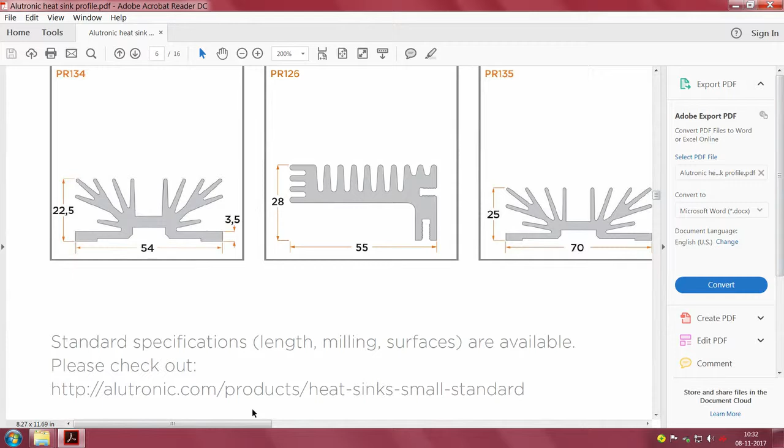Now, not every time do they start with absolutely new fin designs and so on, because these have been routinely used for such a long time. Now, if you have a look at a typical heat sink from the manufacturer, you will notice here that several of these profiles have already been in use for quite some time.

You have seen this here. So, you have something which is typically around 100 mm wide. So, this is the 100 mm wide heat sink, and then there is a 4.5 mm base for this aluminum. Now, I will try to move it here. Now, have a look at this heat sink which is about 111.5 mm wide, there is a 10 mm base.

Now, if you see the sample which I have here, sir, show them the sample. That heat sink probably belongs to one of these things here. Can you see this big monster here, and in fact at the base it is a little bigger, it is 18 mm thick. So, I will just take these things off. See that, and this is not a manufacturing defect, it is just that the extrusion has come like this, and maybe during our handling it has bent.

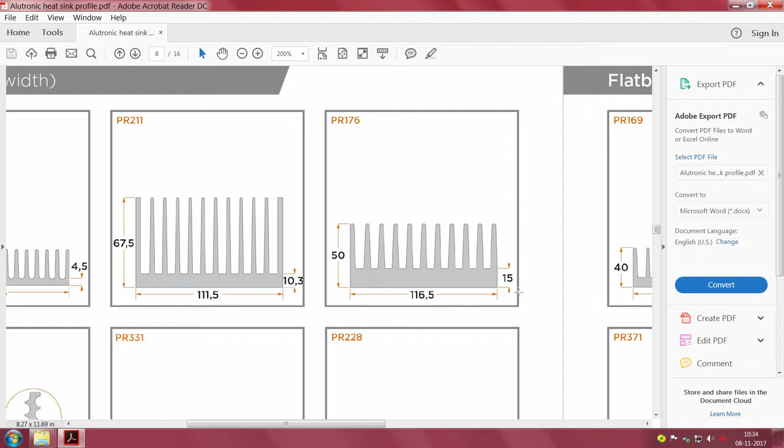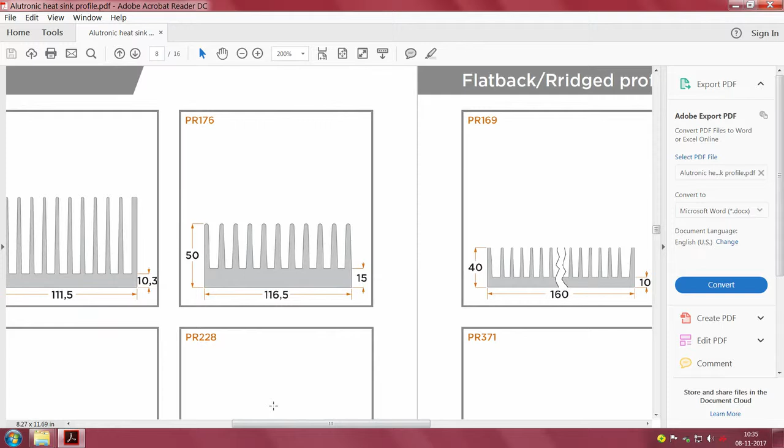Now, coming back to our sample here, such standard or generally replaceable heat sinks are available like this. Why people use one of these profiles is that something nearby will already be available. If you are designing for something, we know very well somebody else probably has the same type of requirements, and somebody in the world has made something a little closer to that. The advantage of using this is they are not very expensive, and once you buy a profile like this and keep it, you will be able to use it without any issue at all.

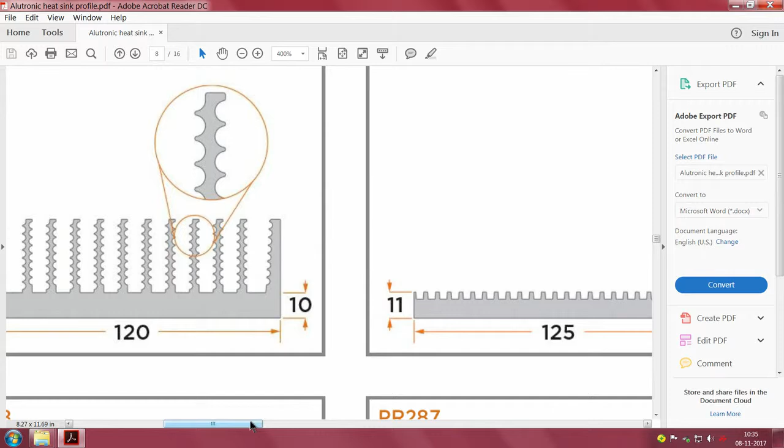So, I will just try to go down, and you see here one more important thing: if you are to make your own, we may not be able to achieve this detail which they have given here. You see the detail there at the left, some attempt has been made to increase the surface area by providing additional ridges. Now, the next question you may ask is, sir, does it really help? That is for you to make a model and then compare what they have with what you have, and there is no IP involved in checking these proportions and adopting something similar.

Now, if you again look back at this small thing here, can you see here? These ridges are a little offset. Is it good or bad? It is for you to decide. From my point of view, I feel they have optimized the load involved in creating the extrusion. So, if you just put a tapered extrusion and give a few cuts on this side and that side, it may or may not be useful.

But if you see this corner here, the way they have offset it, and while the detailed drawing does not clearly give you the details, probably the base is a little wider compared to the top, and we need this specific type of design because these are all extruded in long lengths. I am not very clear what the current standard is. In the shops you will get them about a meter long, but in the extrusion industry they are all made for building standards. Building code requires that you start with something typically 3 to 4 meters long. So, you have 4 meter machines and 3 meter machines.

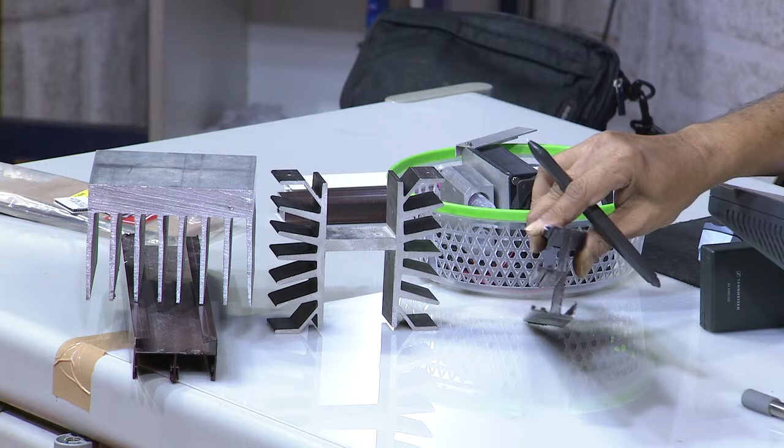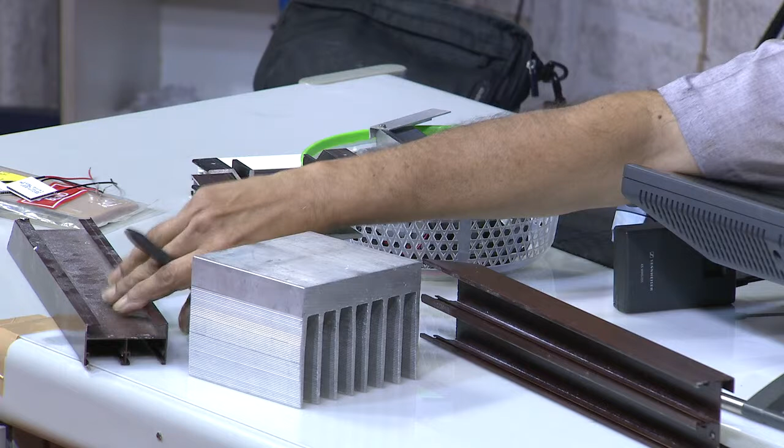Now, if you can see the samples which I have put there, these are all samples taken from the building industry. I do not know what exactly this component is. There was some construction going on, I just picked it. It probably looks like an extrusion for a window or something like that. You see the mitered or 45-degree joint there. So, two of them can be joined together and you can make something a little like this.

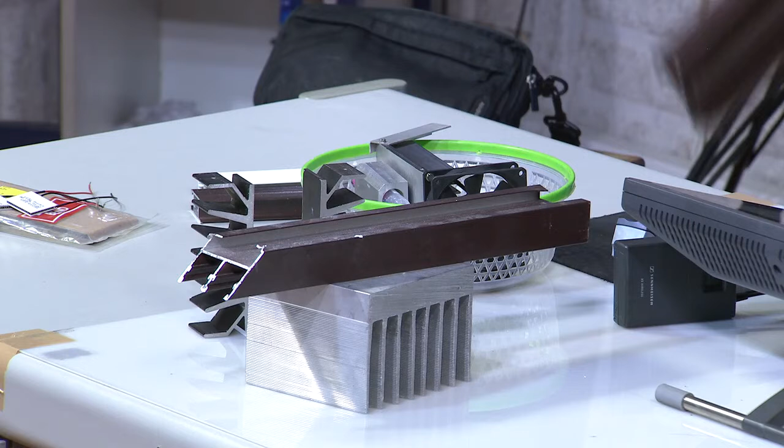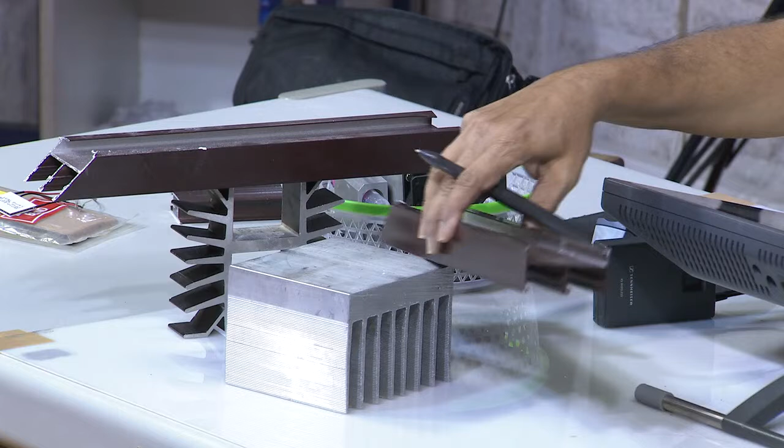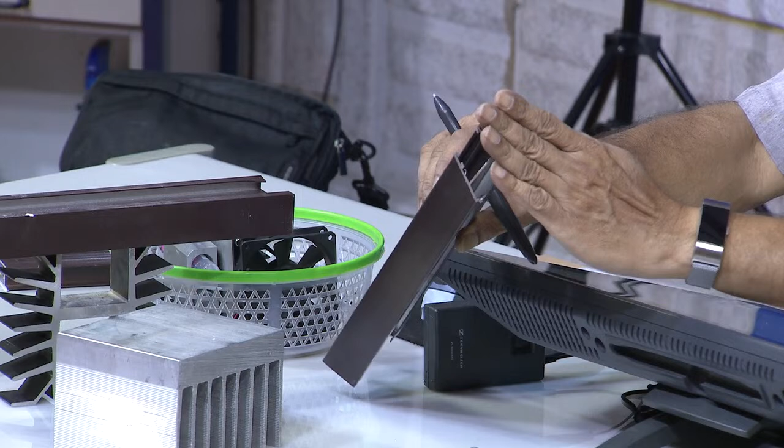Unfortunately, that element of detailing is in no way useful for us. They have made some arrangements for something to slide inside. There is some extrusion, I mean one angle, something which will go here, and they meet perfectly, and then you can assemble things. These are not useful for us in any way when we talk about our own electronic extrusion.

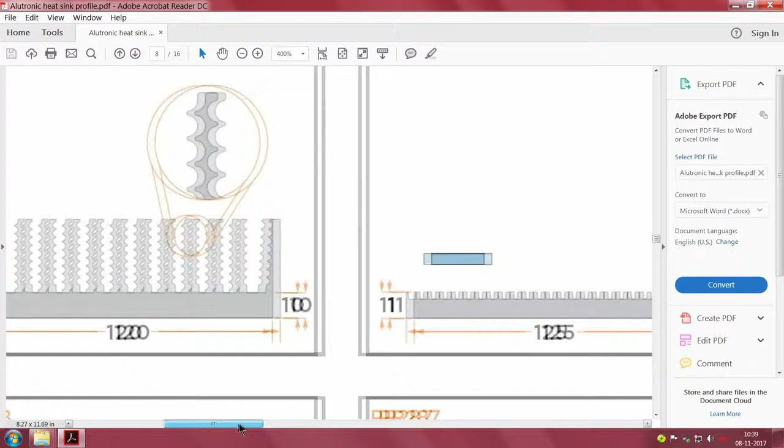So, the Alutronic extrusions you see in this catalog have been specifically developed with our concerns in mind. If you go down, you have very simple, straightforward things like this. See, this one has only a U-shaped base, so that will give a general advantage. Then ridged profiles, which I have shown you already.

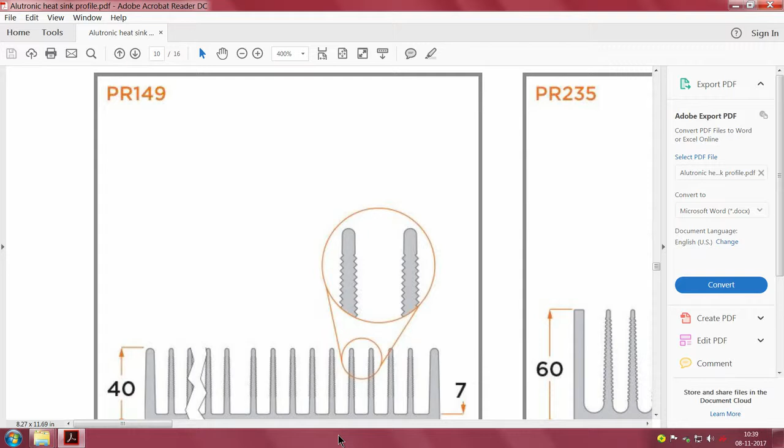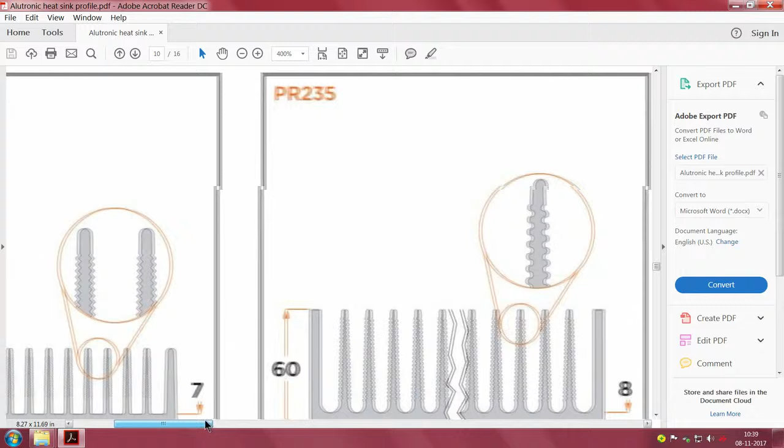You see here they are directly in opposite directions. There are these ridges here. You have noticed something which is very different. Here it is tapered. So, probably the actual electronic users like you and me have insisted that they want a heat sink that is much more effective. Now, you notice this is slightly different from what we have seen there.

That same ridging is available there, which is a radius ridge, which probably has some advantages, and to make the fin effective it is much wider at the base and much narrower at the top. Now, whether it is calculated or not depends on the manufacturer, I will call them the vendor, with the actual user, which is the designer.

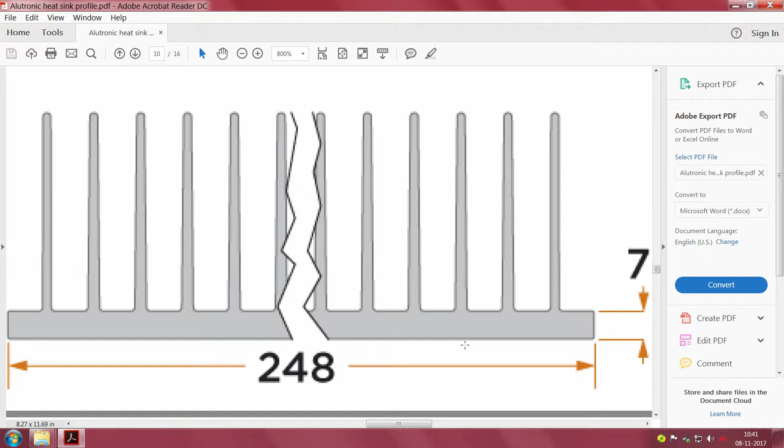I expect that since this tooling is very expensive, somebody has done the homework, and these days homework is done by carrying out a simulation, probably in a computer, and then they should physically analyze which is good for them. You understand? Some of these, if you see, are very thin, so not very effective, and that gives you a general indication that these are probably meant for simple natural convection, not for forced convection.

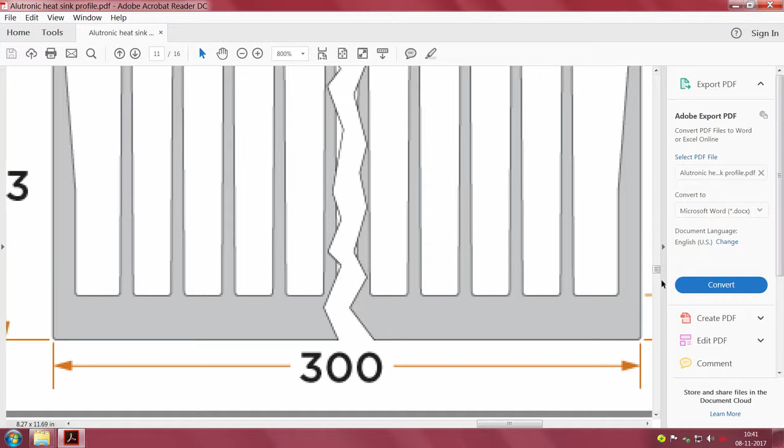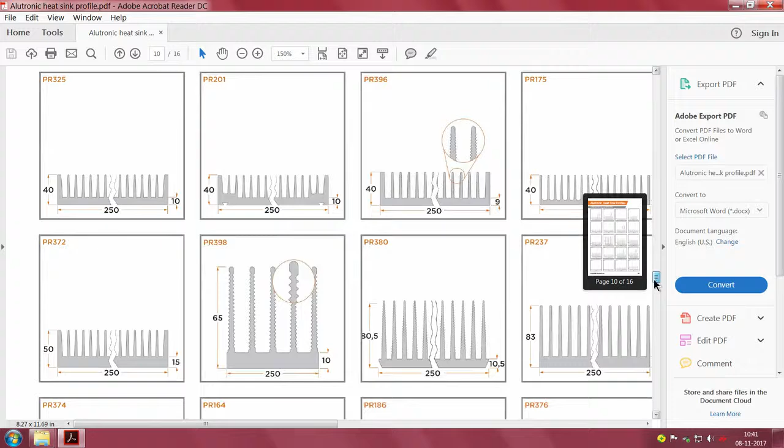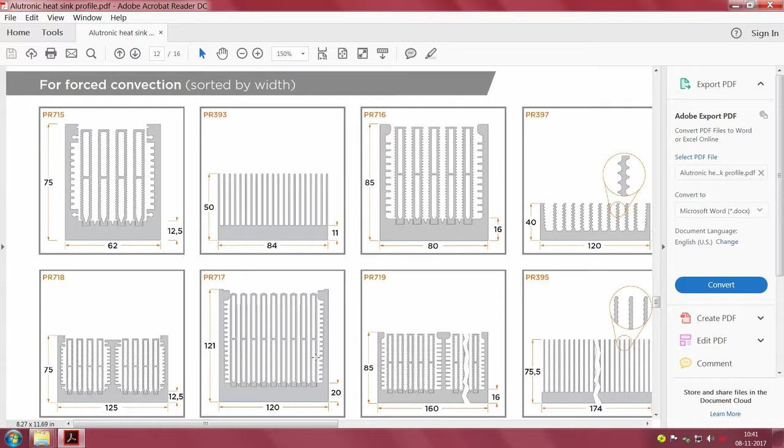When you come to forced convection, you will notice that they are wider like this, and there is a little more space here. So, not just by looking, but if you now go back to this catalog, you see here very complicated things. Have a look at this. I am not very clear what it is for, but I expect it does have a purpose. You have extrusions in which I do not know whether it is a support or whatever it is. You can go back to the catalog.

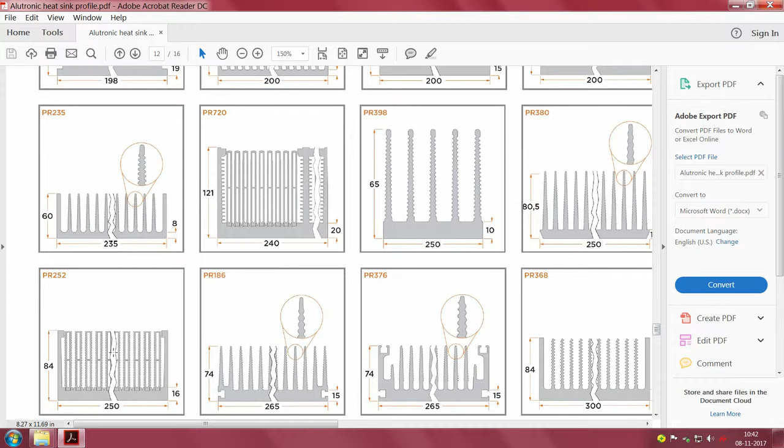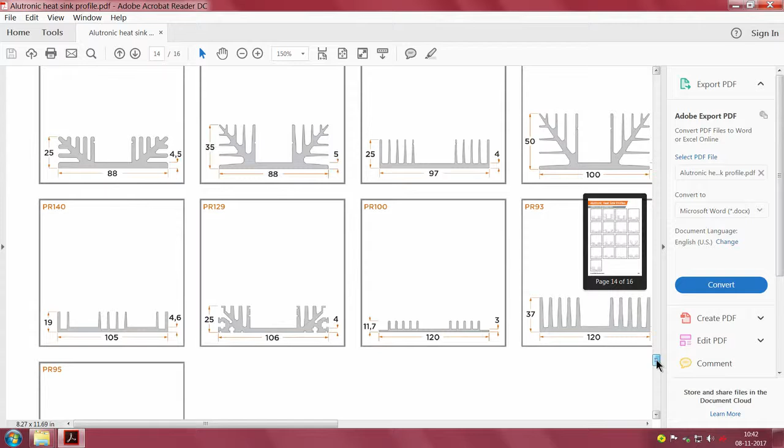This catalog is taken from Alutronic. Alutronic has probably developed these things for military and other professional people, so they will give you a lot of data if you directly interact with them. These are a few of them which I have been showing you here. So, I will just talk about one small thing. Occasionally I find, while I am not a nitpicker, if you have a look at this, I hope I will be able to go to it.

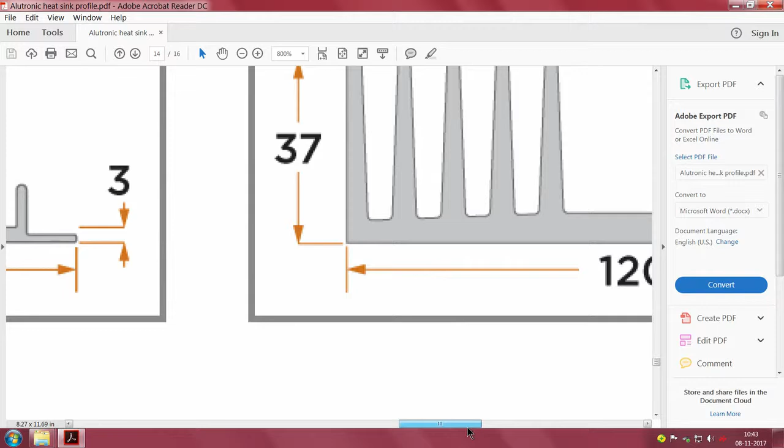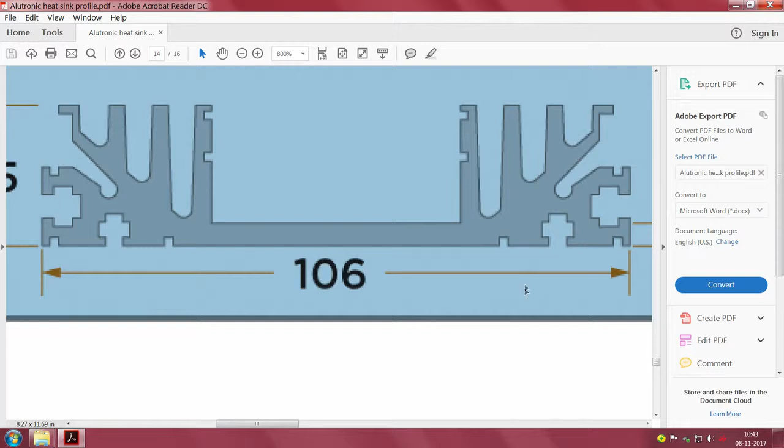We are partly here. You will see one or two obvious things which they have overlooked. One of them is the small notch here, which does seem to make some difference. See that notch there? It is likely to seriously interfere with the heat conduction pattern. See, this is the small bridge that is available for us. This is the restrictive bridge.

So, any heat which comes here has to cross over this narrow path here. The moment you attempt to cross over, all these fins will not be that effective anymore. So, if they had removed this and then optimized the location of all these things, then these other fins could also be used.

But then, purely from the product design point of view, probably this was required for some alignment or, I do not know, whatever it is. So all this heavy mass here is really not as effective as we want; have a look at it. So it is for you now, if you can include this in your thermal model,

it is good. Otherwise, the best and simple way is to take a section of approximately the length you would like to use, mount a few power devices, keep them in the linear region, excite them and see what will be, in your conditions, the thermal resistance of a thing like this.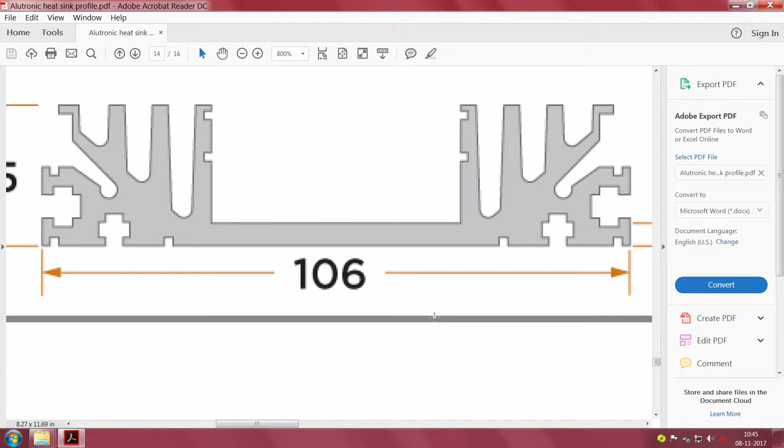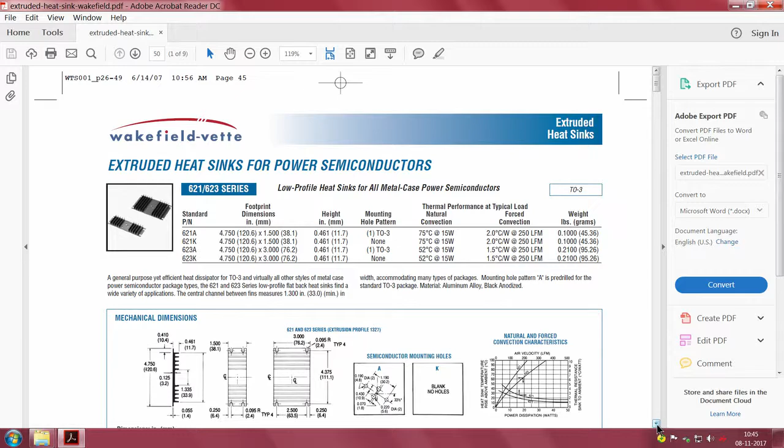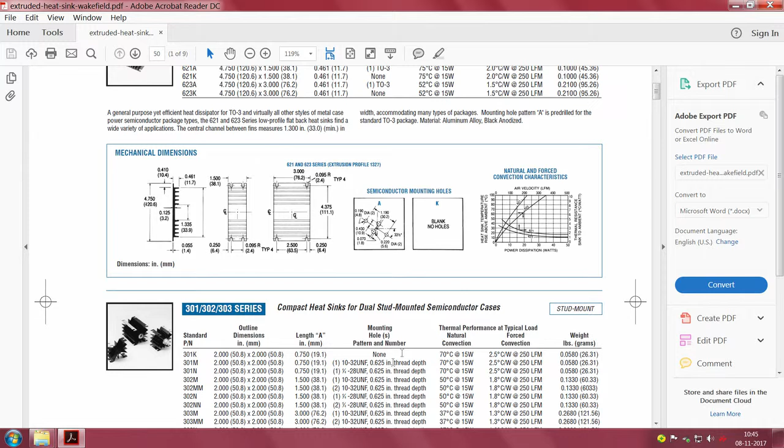Now, I will try to close this and see one more. You see here, this is what I was just talking about. See, what they have done is this particular small heat sink here, I will enlarge it later, you will be able to see. They have given details of, this is from an earlier era where we used to have the TO3 packages, and then you see this is probably the most important thing I would like to point out to you.

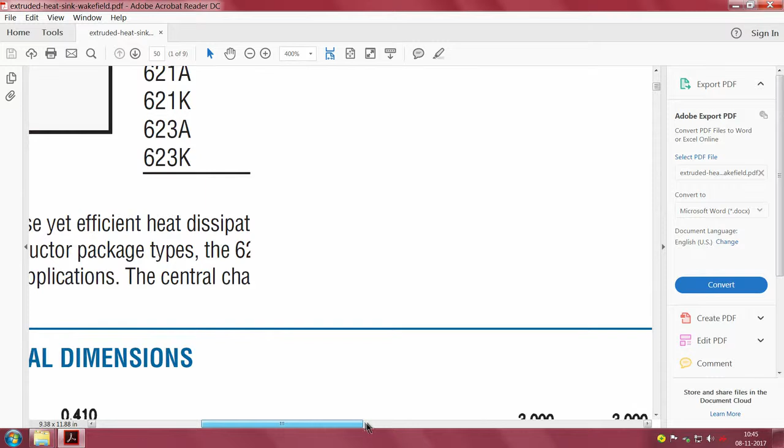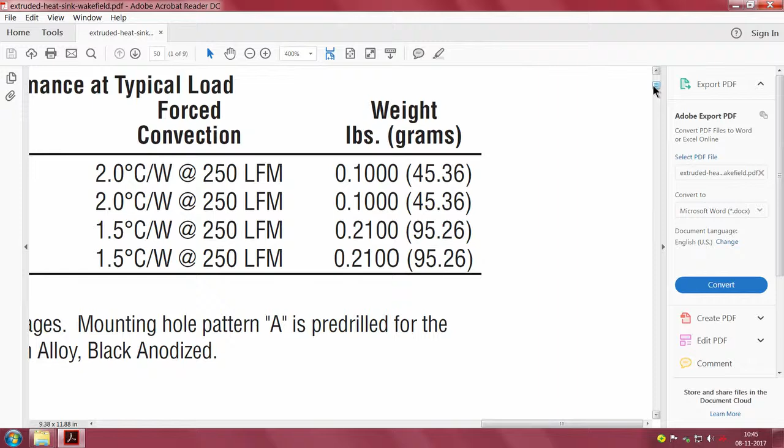Allow me to just play around a little. Got it. Seen something here? Air velocity, then you have power dissipation, and then heat sink rise above ambient, and then thermal resistance, all of them have been conveniently plotted here. So you will notice that the heat sink temperature keeps rising.

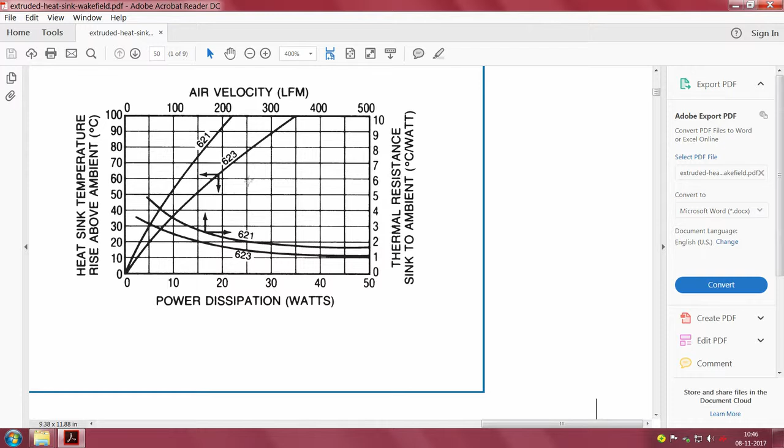So, they have given for 621 and all that. How to read it, they have given on the other side. So, instead of my talking about it, I suggest you try to read it yourself. As you increase air velocity, the thermal resistance comes down for both 621 and 623. At the initial stage, typically around 5 degrees centigrade per watt will be there, and then, I am sorry, the thermal resistance will keep coming down.

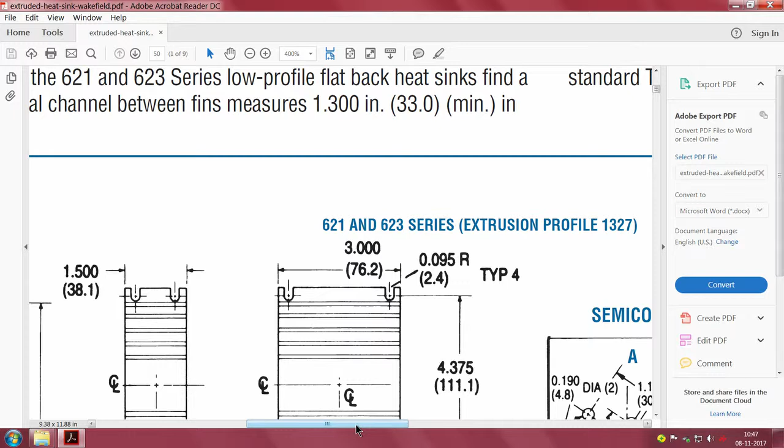They have just given generally how to mount it, and then generally what is the length, and then also a little bit about these two models, 621 and 623, and extrusion profile 1327. They have cut it here. So, then they have given details of the low profile. You see, the issue is that basically it is an extremely low profile device. So, we need to now check.

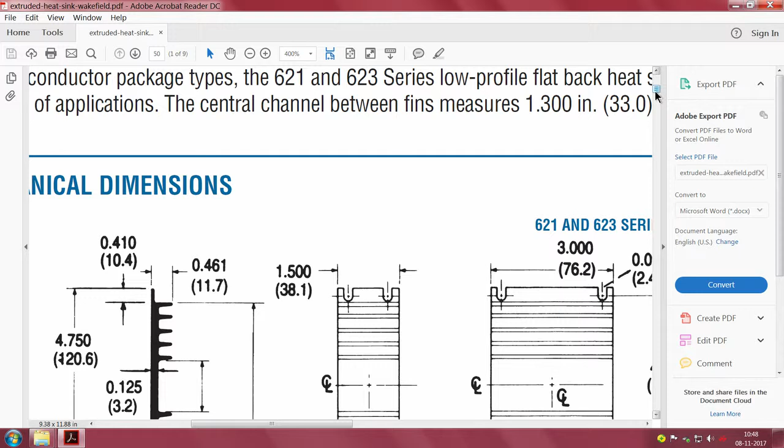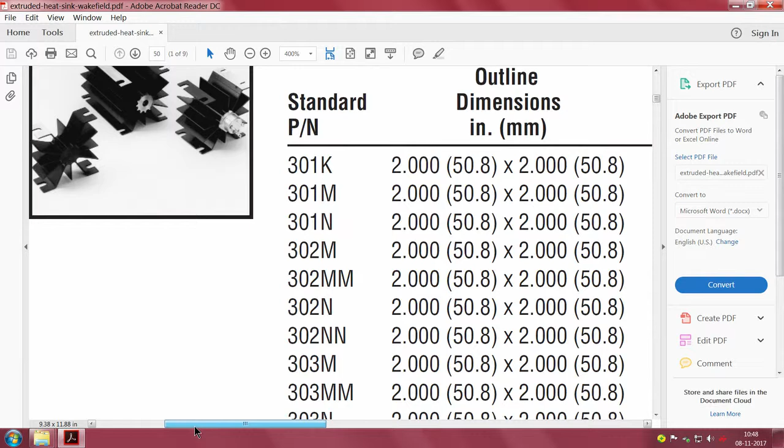Now, if you go back here, you see at the left top, you have the heat sinks meant for stud mounted devices. So, we have a stud mounted device, and I am not sure what it is. And one more thing I have noticed here, the anodic layer has been removed and it has been machined clean. Two variants are there. One is you mask it such that it does not get the color while adding the dye.

Another thing is you get it in the proper condition, because manufacturing is easy, masking is always tough. After you get it, since the other operations are required anyway, including tapping and things inside, you lightly machine it, and in the same way you can also probably lap it. The moment you do that, you have a fantastic mounting surface, and then you can do whatever you want with it.

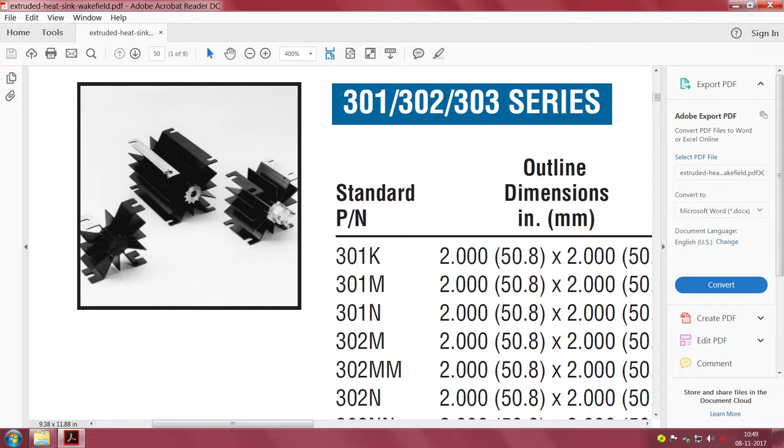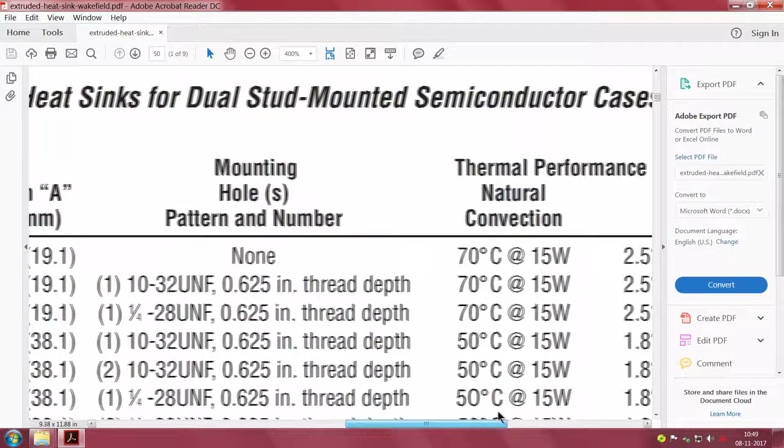So, this is part number 301K they have given here. Now, on the extreme right side, for each length, mounting holes and thermal performance they have given. You have seen that.

Natural convection versus forced convection. If you give this much of, I am not very familiar with the units, down it is explained. For a stud mount, if you do not use anything for a given length, you typically get about 70 degrees centigrade at 15 watts dissipation, and here you see in forced convection 2.5 degrees centigrade per watt.

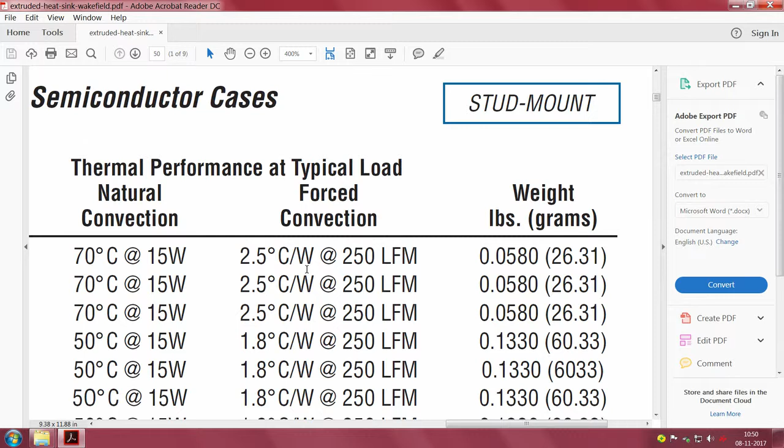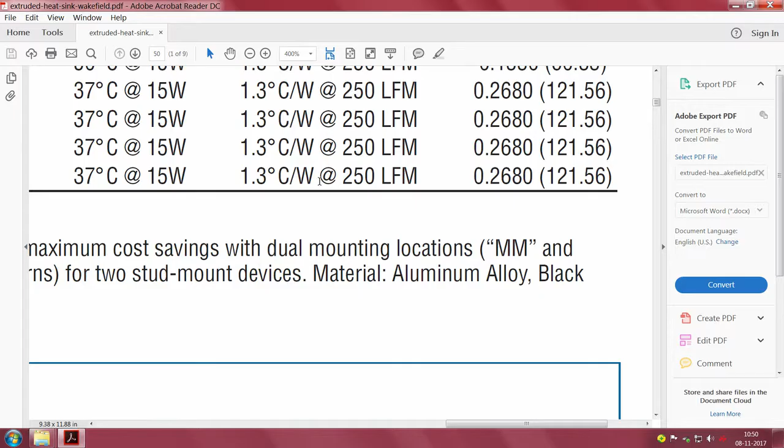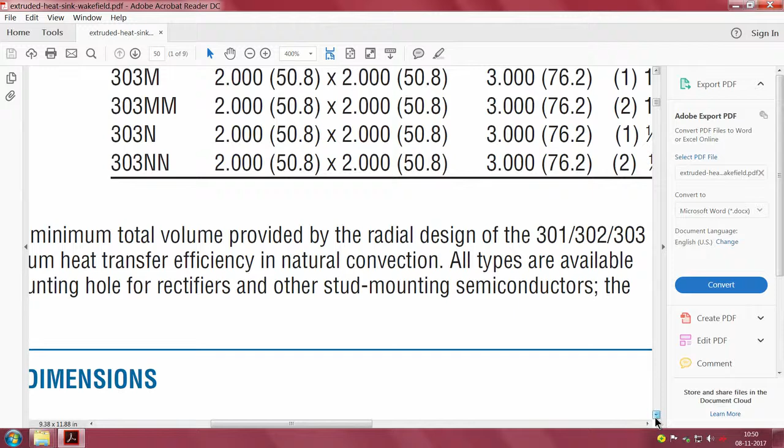So, you can keep multiplying, and then you see here as the length increases, these numbers keep coming down. You can come all the way up to almost 1 degree centigrade per watt, and they are not very heavy. Then you see here the length is not very long. So, we have more design data about these things which are circular.

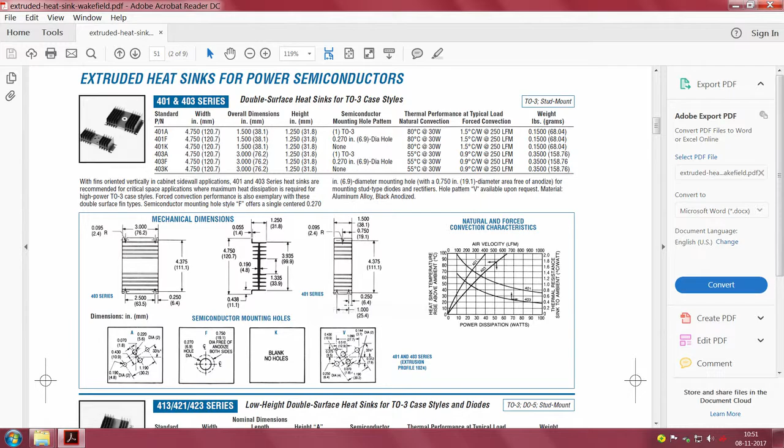So, if you go down, any of these manufacturer's catalogs gives more and more details about how you mount these devices here, and then you see here there is something very interesting. So, if you now look at these type of heat sinks, this one I will see if I can enlarge it properly.

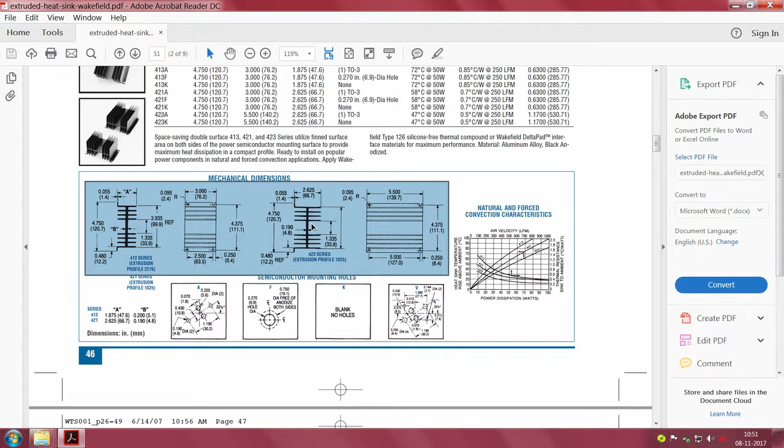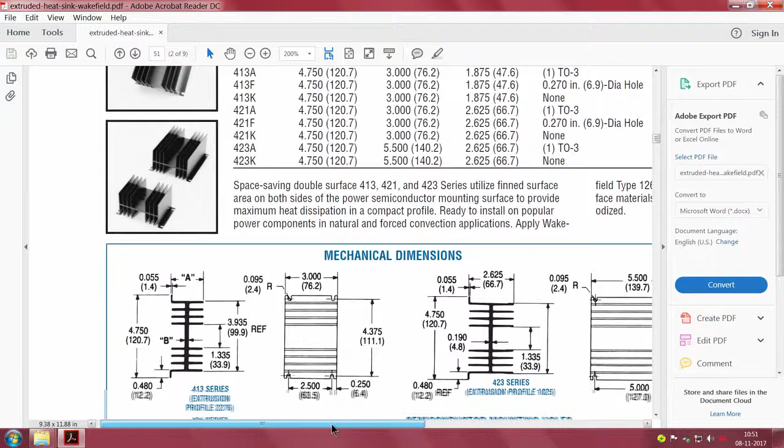Unlike the other things which I have shown earlier, this has fins on both sides, and width is 66 mm, usable length is about 65 mm, and then this length of it comes to 120 mm. Okay, I will take this as height of the heat sink and the width of the heat sink 120 by 66, and then you have lengths of 76 mm and nearly double the length of it.

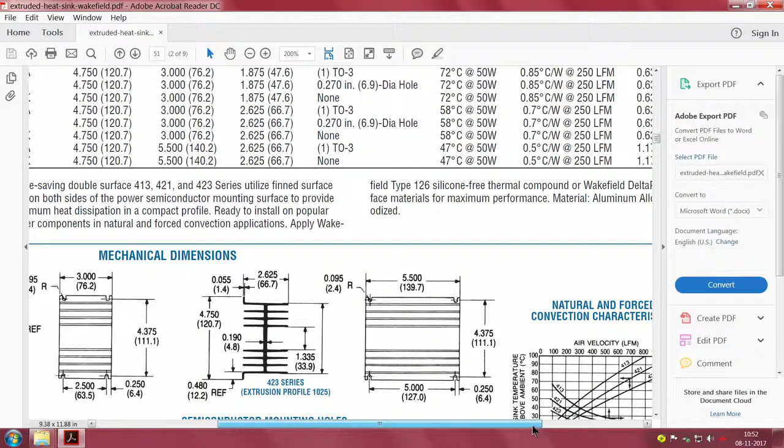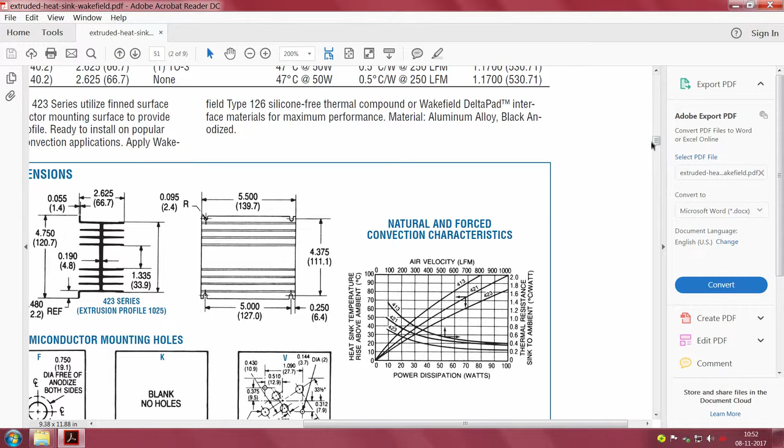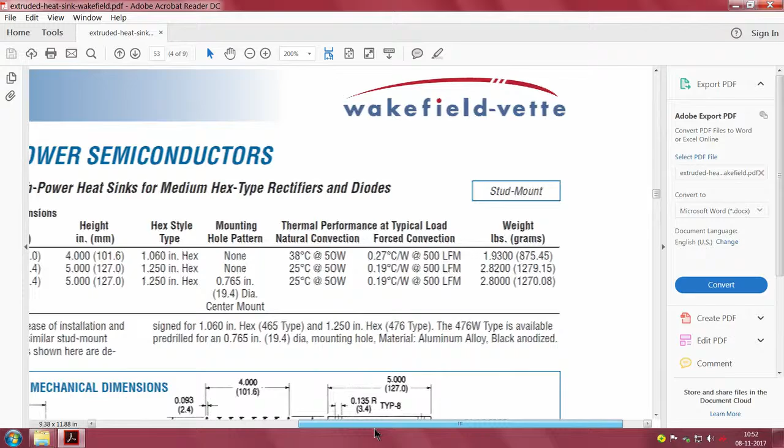So, you see here this heat sink performance, I suggest you separately look at it in your hand, and you see that as the air velocity increases, how the thermal resistance comes down, and then how the heat sink dissipation increases. These details are given here for most of the commercially available power semiconductors. You have seen this. Then we have something for the various rectifiers and so on. So, this is a huge catalog. Deliberately I have taken an old catalog, so that the samples we have approximately coincide with that.

Now, this again looks a little like this other heat sink we have here. You see this, we have another heat sink here, and now you will probably appreciate. Now, if you come back, we again have a fan which matches this. Now, you see here they are nicely made such that they fit here nicely.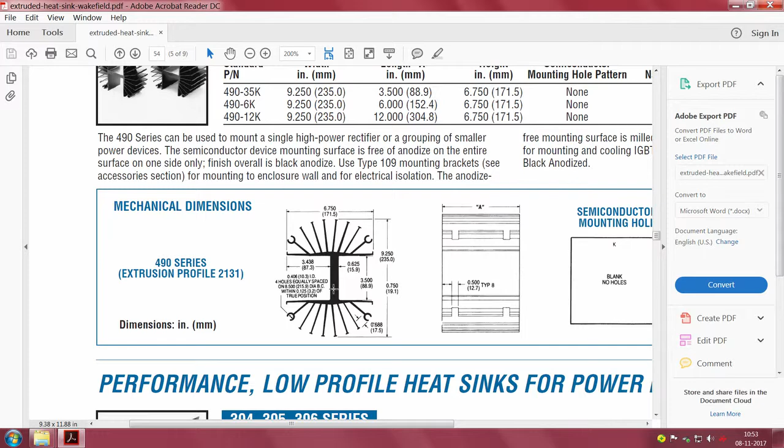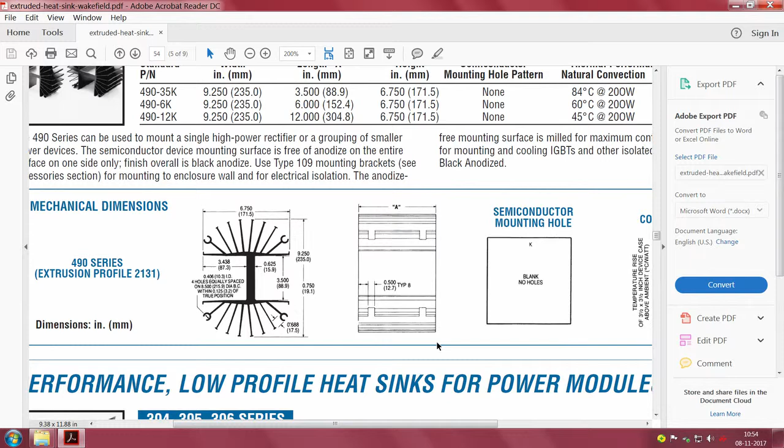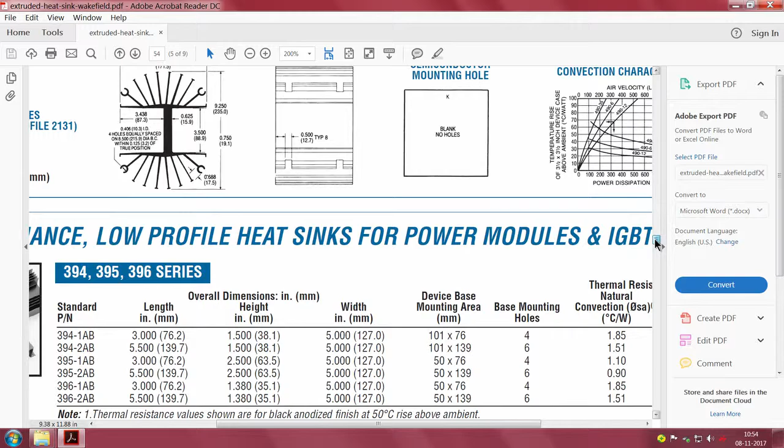So, we have a fan which is probably 235 mm square. You can mount all these things. There are mounting holes here and a huge amount of space they have given, such that we can mount things for various semiconductors, generally supplied blank, no holes, and you can attach fans directly, and then both in the push pull mode, this is also one of the interesting things. I hope the catalog now shows. Yeah, you see this. I will draw your attention to this particular picture.

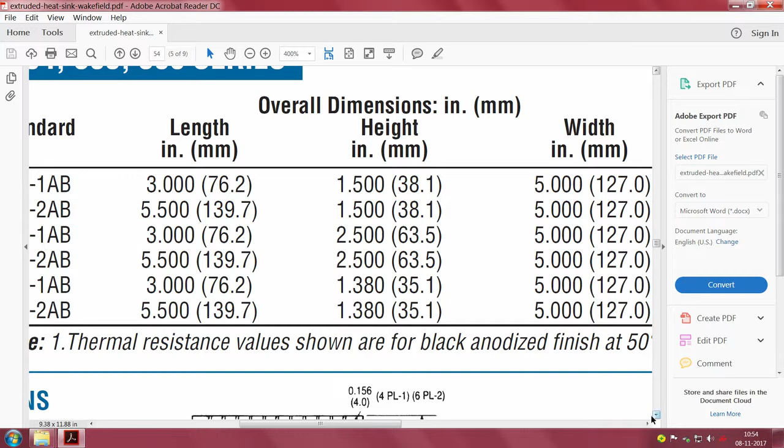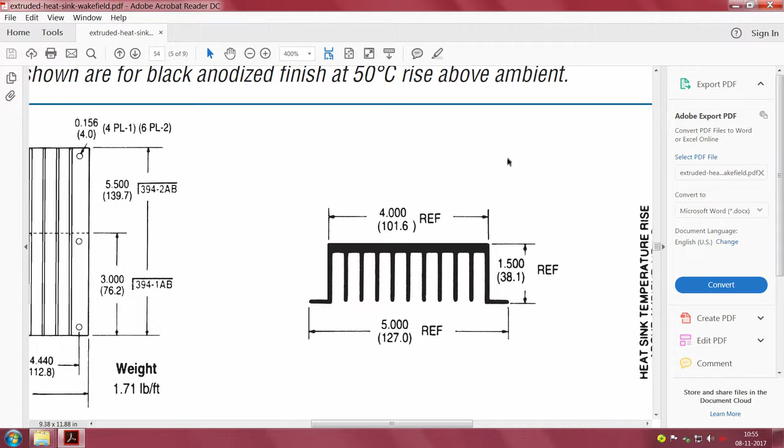Unlike some of the other heat sinks which I have shown, you have noticed the mounting flanges are near the tip of the profile. So, these are probably the ones that are used in power semiconductors, power electronics equipment, while this part faces the wall. You have seen this, no? This part faces the wall, this flange can be used for mounting, and all your semiconductors can be mounted on this face, and if you put a cover here on the other side, your equipment is ready.

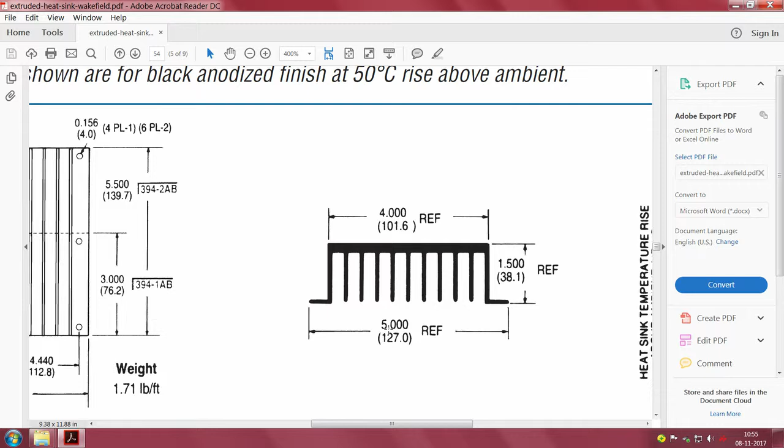And very miraculously, these dimensions, in this case about 5 inch, probably follow the panel mounting standards. So, I have the patience to go through all the catalogs, or one more thing, intellectual property is to be protected, but just like in the academic case, with published literature we are expected to verify and then acknowledge in case somebody has already done the work. You cannot publish what somebody else has published, however you can acknowledge and build on it, the delta. Same thing it is with our design also.

In the beginning somehow you have to find out your needs. Once the needs are over, comes the important thing. Instead of treating it as a patent search, you need to look for the prior art, saying how others are doing it. And in the prior art, while I am not advocating violating IP, we can show how others have already been doing it. Only thing is you cannot get an IP on that. So, typically this is one of them. So, if you take a standard drive, there are any number of ways you can mount these heat dissipation things.